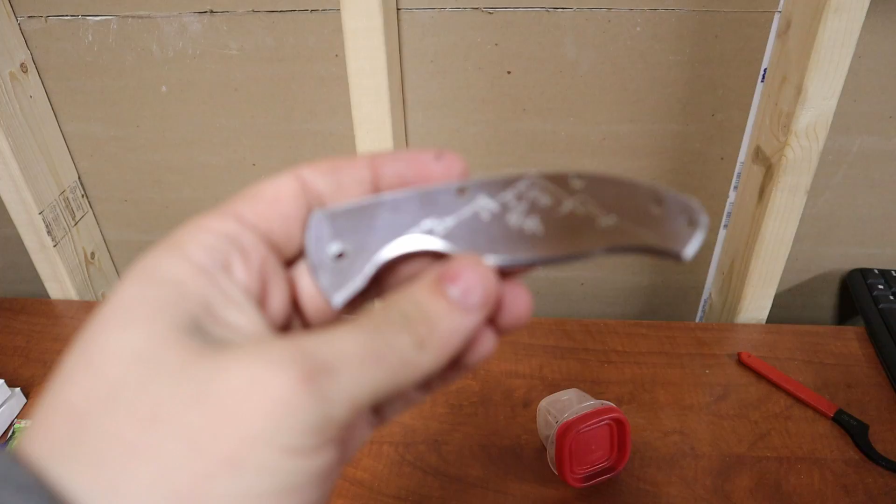Alright, today we're going to work on some handles for this guy. It's a Spyderco Tenacious. Hold on. I have a prototype. Focus. Yeah. So there's a mountain engraved into it, and that's pretty cute, but so that fits like that.

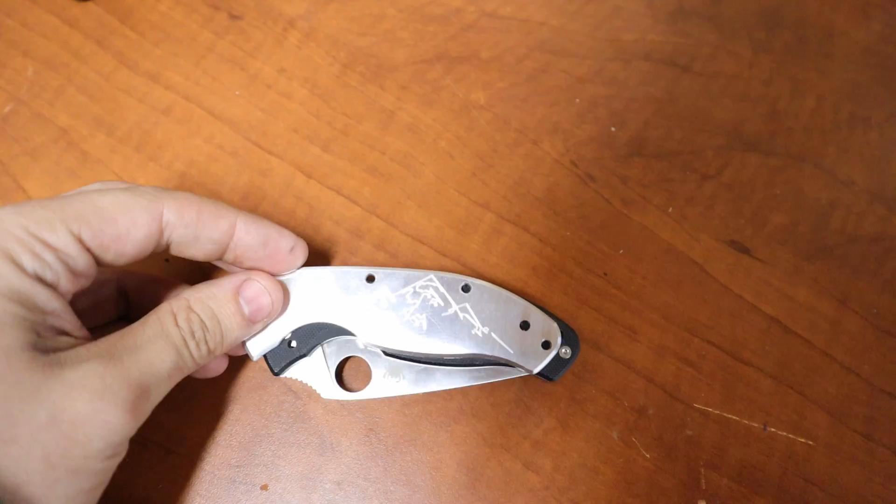There's a couple things we got to work on. One, the thumb release here is not deep enough compared to the one on the actual blade. So you can compare the two. Personal preference, but I'd like to have one that's closer replicated to that. And then I didn't have the right drill size for these holes, so I couldn't actually mount it yesterday, so that makes it a terrible prototype.

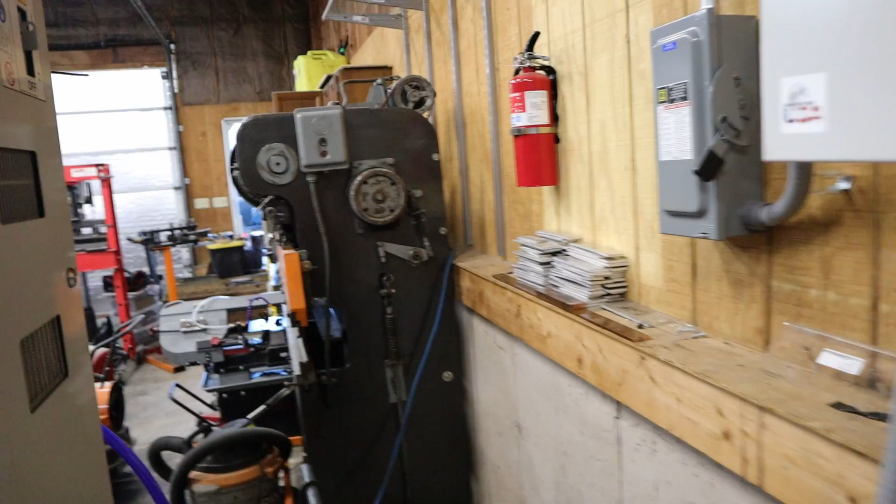And some of the engraving is not as good as I wanted it, but I think it has to do with the fact that the engraver's a 20 thou ball, and this pattern must have been narrower than 20 thou. So actually, we're going to do the start sequence for the machine, and then we're going to fly into Fusion and fix the toolpath. Bam.

Sweet. So here's what she looks like. So this is actually a model representation of... Actually, now I'm going to go find a knife so you guys can compare.

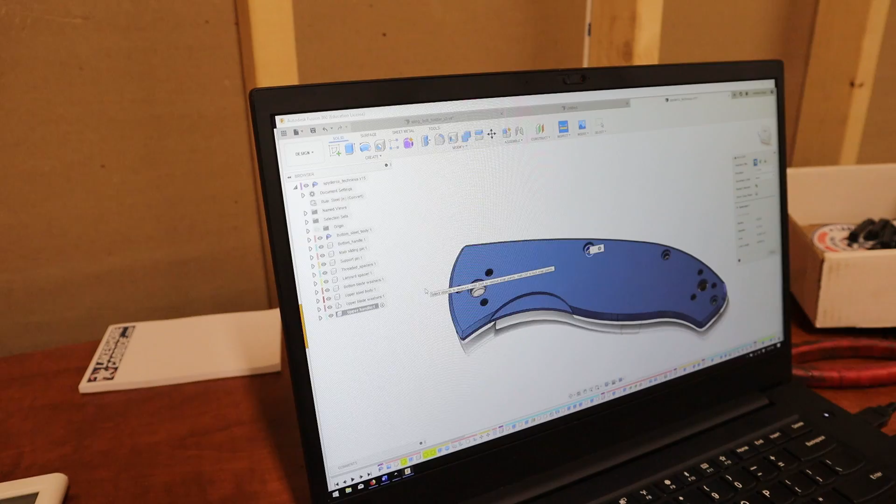Oh, God. Good news, I found it. I went into the house looking for it, and turns out I have fetal alcohol syndrome. It was here the whole time.

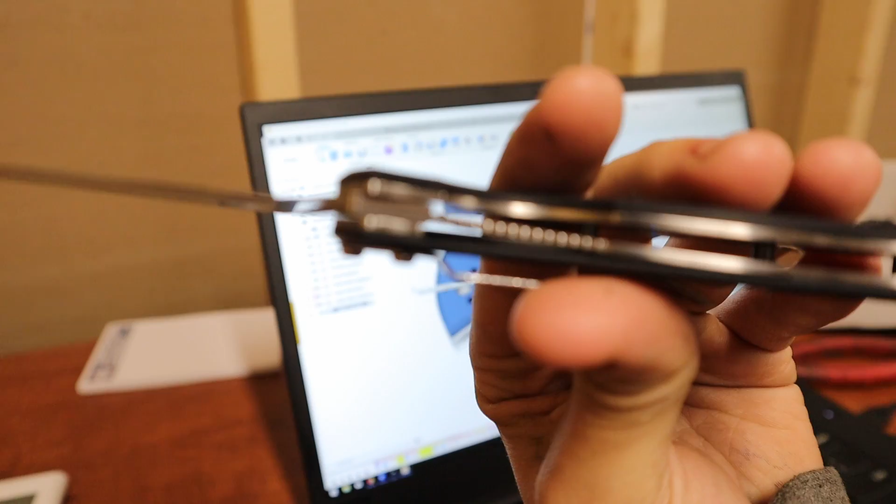What is this? Oh, the other thing I need to look at. This is the real model. And hold on. So what I have modeled in here is if you had handles that were anodized blue aluminum. But the rest of it is pretty much as accurate as I could get it. So you even have the bottom piece of spring metal and then the top piece of spring metal.

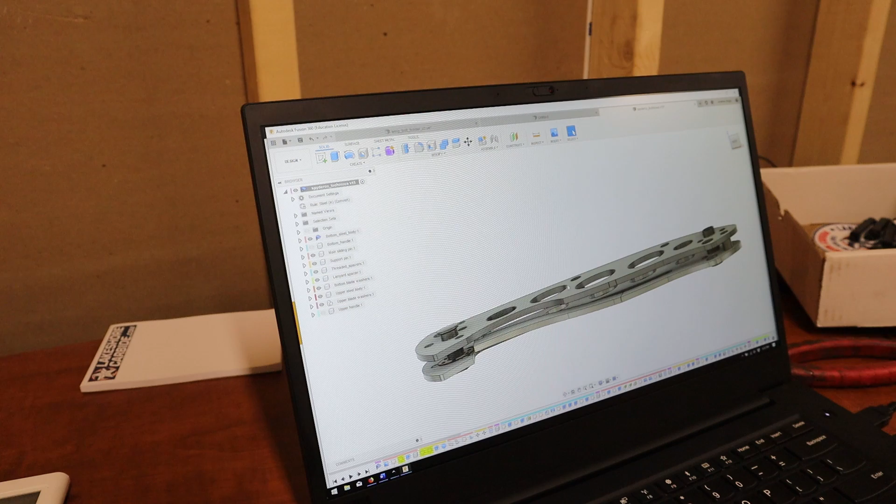And I found out when I was taking this guy apart that both the pieces of metal are pre-stressed, but the top piece has like a bow in it. And I don't know if that's manufactured on purpose, but it adds a little bit of rigidity to the center section of the knife where there's no pins, because obviously the blade sits right in this section and you can't have pins there. So I thought that was kind of interesting, even on this $40-odd knife you can pick up at Walmart or whatever.

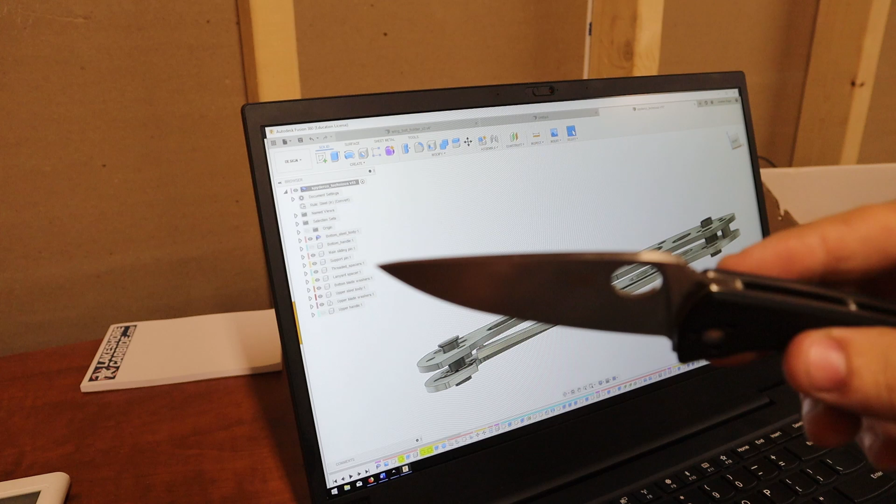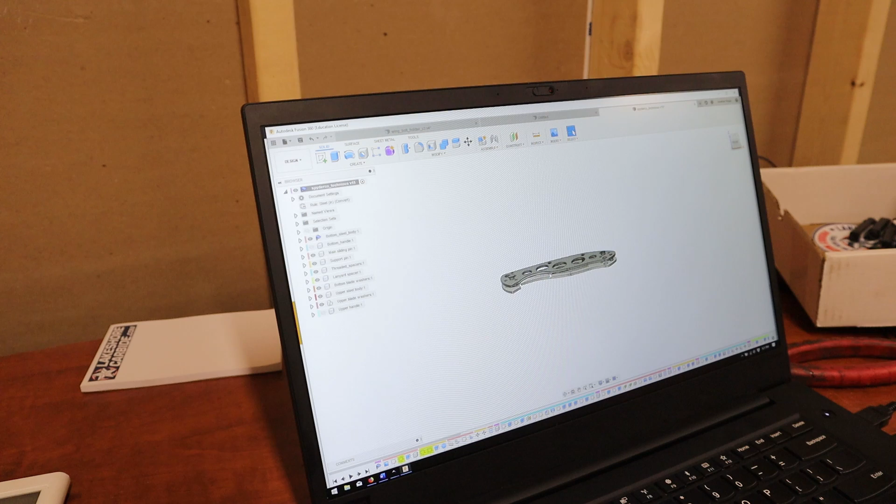And then basically I got as accurate as I could with the slider pin. I'm not actually sure what it's called, but that's what I'm going to call it. And then the lanyard pin over here. And then the actual threaded pins, which are threaded on both ends. The speed holes aren't very accurate, no reason to have them accurate. And then the actual handles themselves are what I care about for doing the profiling. Basically, I took the model and I cammed up the model, and that's how I got this.

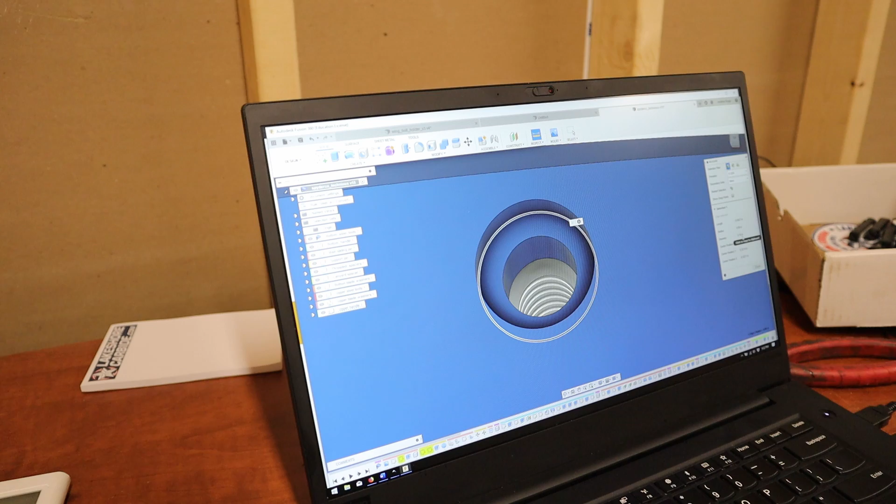So the couple things that I don't like about the handle, which is the reason we're doing another prototype, is first of all, most important, the bolts don't go in. I'll actually just show you on the model, there's a relief here, or a counterbore basically, really tiny, and for some reason I couldn't machine the counterbore with a 1/16 end mill. So if you inspect it, the diameter is 160. So actually that should be machinable. I'm not entirely too sure why it wouldn't let me, but that's something we're going to look at together.

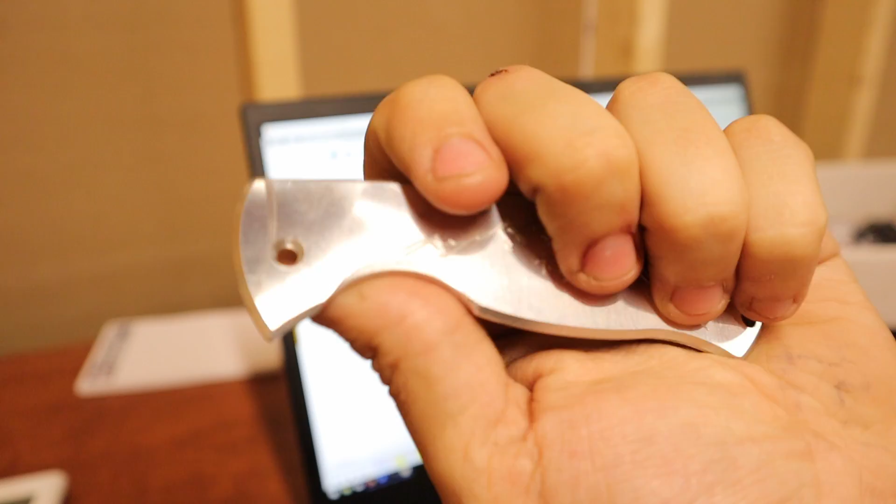And then besides that glaring issue, there's this on the chamfer. I wonder if it'll focus for us. Rippling along here, and that was because the toolpath was doing this kind of thing on the edge, and obviously a not smooth toolpath is going to do that.

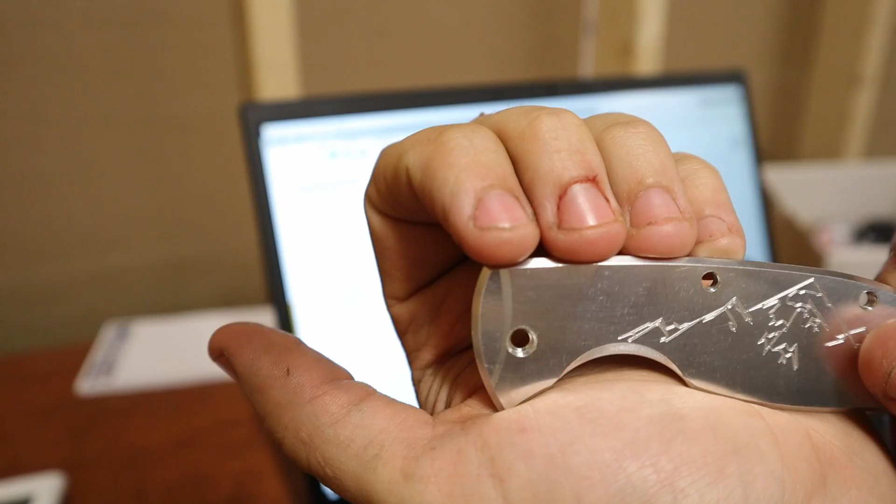And then we have some shell mill marks. You don't feel them, but they're there from the shell mill leaving. I left the bottom just untouched because no one's going to see it, and it's just easier not to have to face the bottom of the actual stock.

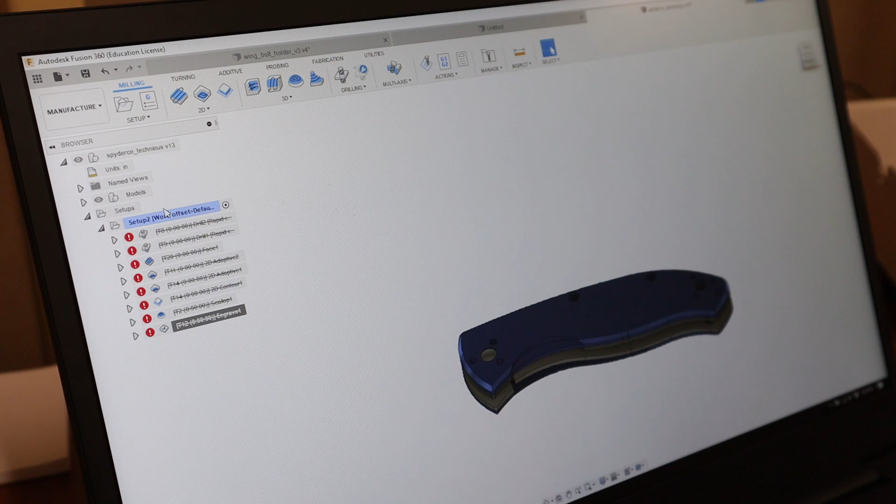So let's see. What I did first was drilled the holes, and originally what I had done was I drilled the holes, but that's because the stock was actually up on top. So basically the model was center the stock, but what ended up happening was I just started gluing the stock down on another piece of aluminum, so I could just profile the whole thing without having to use soft jaws or anything, because I'm lazy like that, and it's prototyping, so I didn't want to have to waste some aluminum making soft jaws.

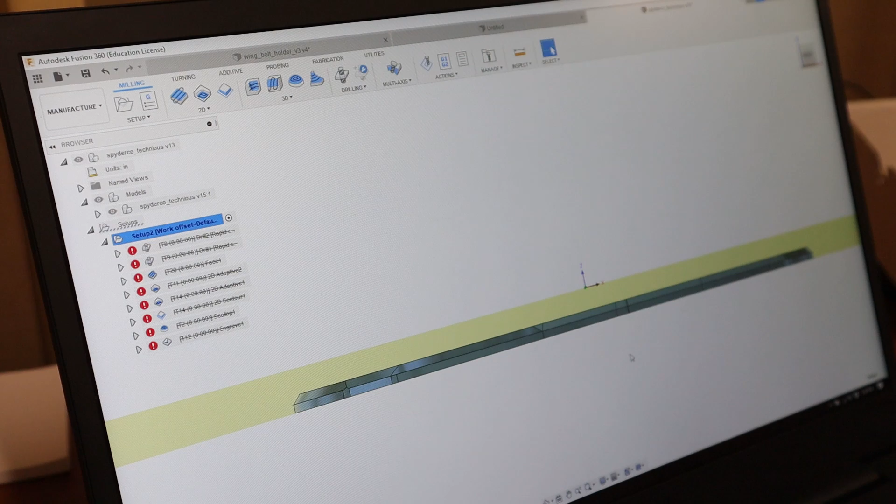Not saying I don't know how to make soft jaws, but what I ended up doing was I changed the model to be at the bottom of the stock for that full profiling. Pilot drill, the regular drill, which we're going to change to whatever size I said they were. Then we did a facing operation, and then we did a 2D adaptive to clean out the section. Yeah, so did the adaptive to do that one.

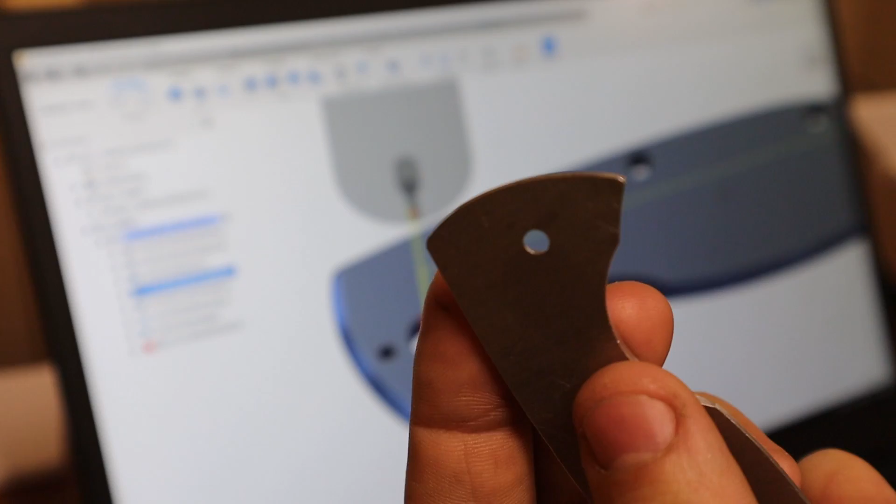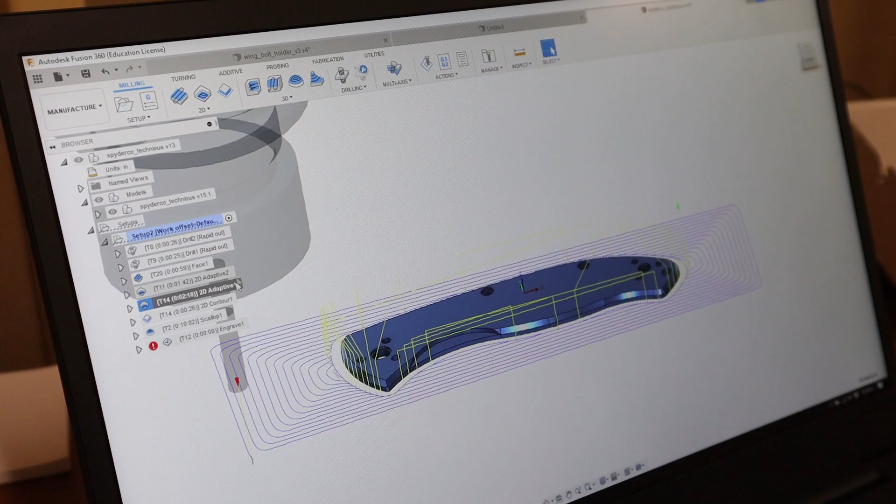Then we went with the 2D adaptive on the outside. Relatively conservative feeds and speeds, I think. 9,000 RPM, 72 inches a minute, so that's a 2 thou per tooth, 440 feet per minute. Yeah, and then full depth, but it's really nothing for a 3/16 tool. And then obviously the scallop to do the outside.

It's chamfer on here, but I don't have the right size chamfer tool. And then obviously the engrave for the mountain that was there. So I just did this as a test for an engraver. I'm using a Lakeshore carbide engraver. Actually, I have it right here, amazingly.

I'm going to fix this thing I was talking about, and then we'll redo the toolpath, and then we'll send it in there and see if that fixes our problems. I got this pretty much squared away, fixed a couple things, and then we'll go run this. But basically, we're gonna pilot drill every single hole. They're not actually holes that do anything necessarily on the actual factory handles, except maybe just for looks.

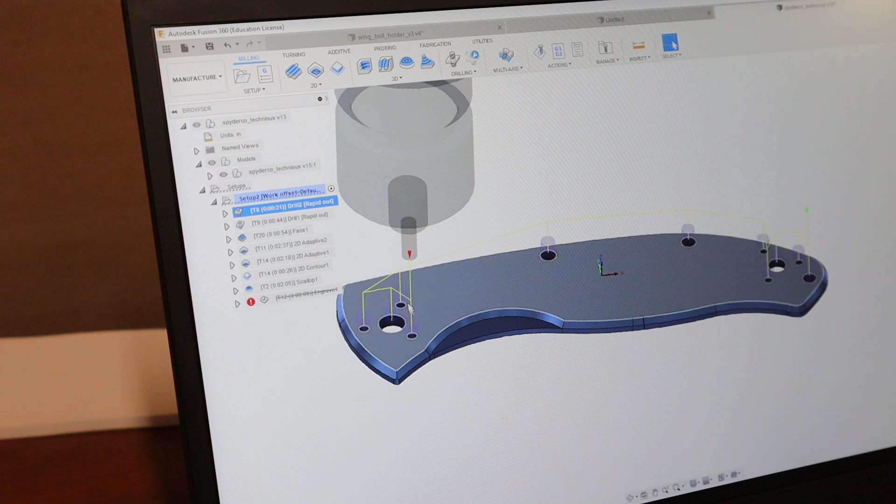I mean, you can see the copper washer down the slider. Well, I don't know if you guys will be able to see, but you can kind of see it. Yeah, that top one, the copper looking thing. Those are the sliders for the action. But what we're gonna do is I'm actually gonna drill those, because those holes are actually the diameter of this drill bit I'm using. So I'm wondering if that's what Spyderco used at the factory.

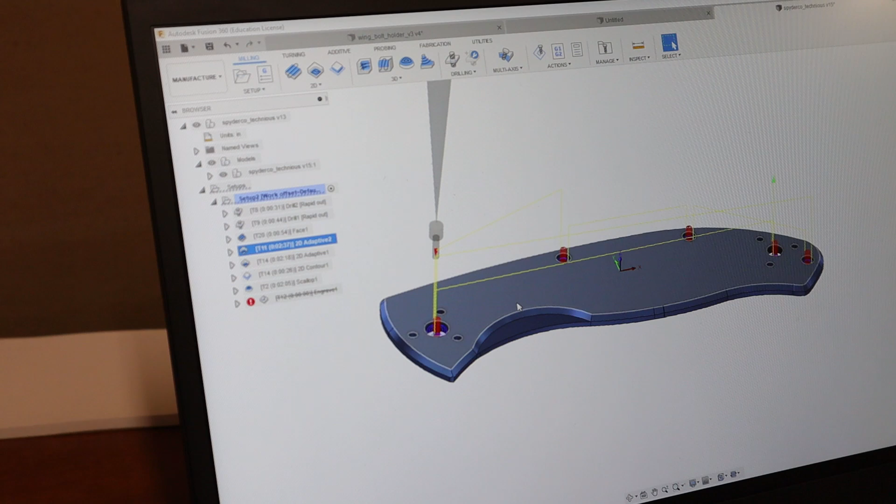So then we're gonna obviously come in here, fly through all these holes. Then we're gonna do a face, 8,000 RPM, just to try to get the finish a little bit better, with a pass extension of 1/2 inch, and chip thinning, but just for giggles, because it's really not that big of a cut. My tool holder went wacky on me. I'm not entirely sure why, but that will now actually bore out properly, it seems, even that counter bore with that small end mill. So we'll see how that does.

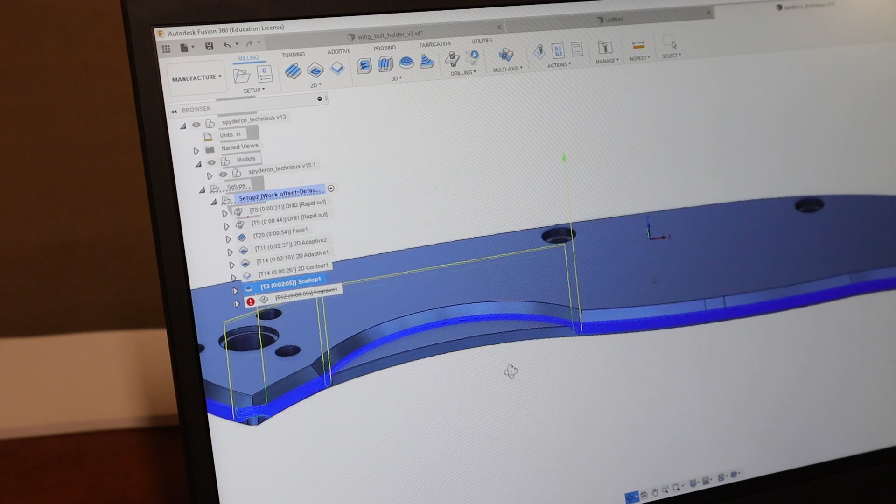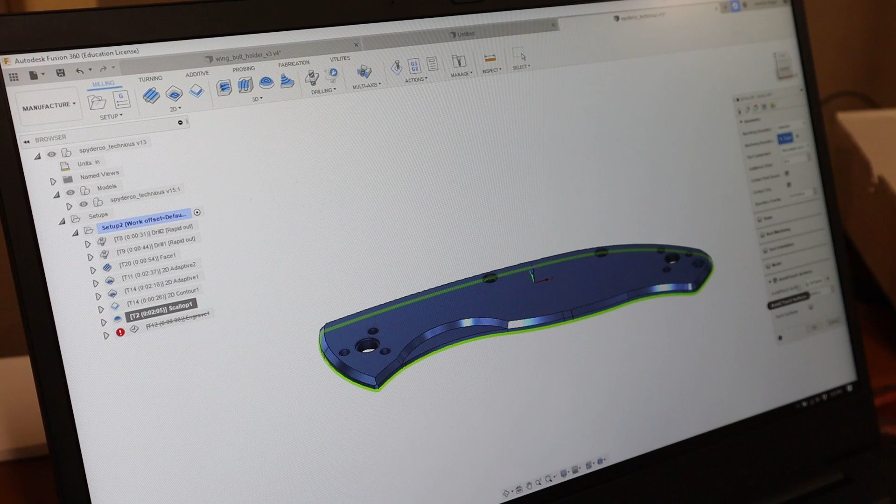Regular adaptive, contour to clean up the edge, then scallop, which, you can see it's a lot more cleaned up, and now it's only going to scallop that chamfered edge with the ball end mill. And so what I ended up doing was using, probably more than I'm supposed to, the avoid touch face, which you guys can see right there. 34 faces. So probably would have been easier just to use the touch mode as opposed to doing this, but you can see I selected pretty much everything except that outside profile.

I even selected the holes, because last time I tried to go in there and rebore those holes, but obviously there's no material left. I also turned smoothing on, because I didn't have the smoothing turned on. That's pretty important for any type of surfacing, which is exactly what we're trying to do here.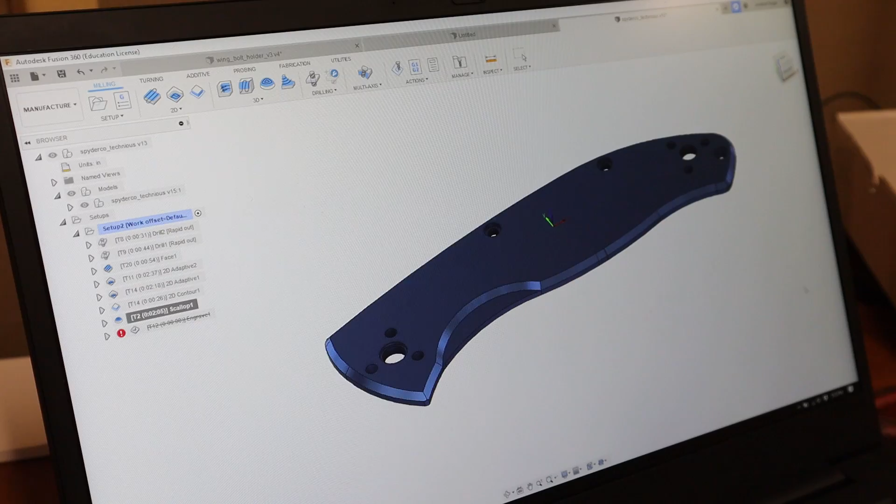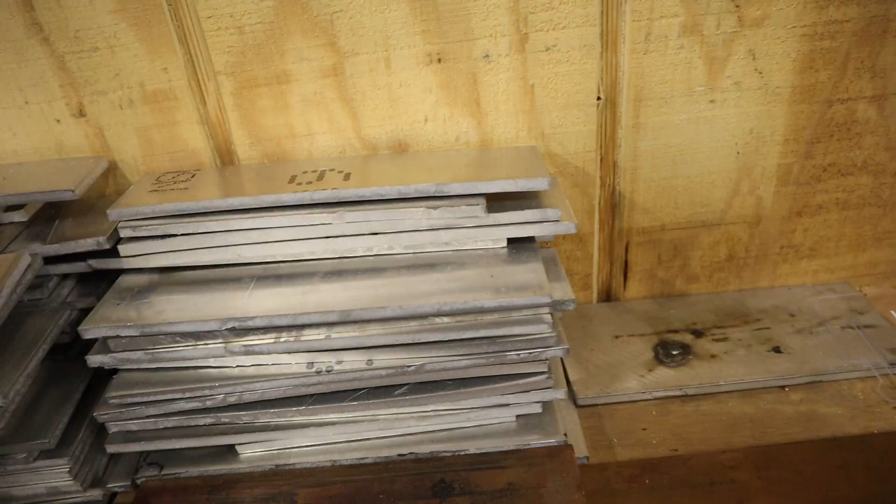Let's go. What we're gonna go do, the machine's warmed up. We're gonna go get some stock, which in this case is just pieces of 1/4-inch aluminum sheared up, hanging out over here on the sheared aluminum wall. So any of these pieces will do that are kind of the correct size. So we'll maybe do this one. Ooh, this one's pretty tiny. I'm also looking to see how flat it is.

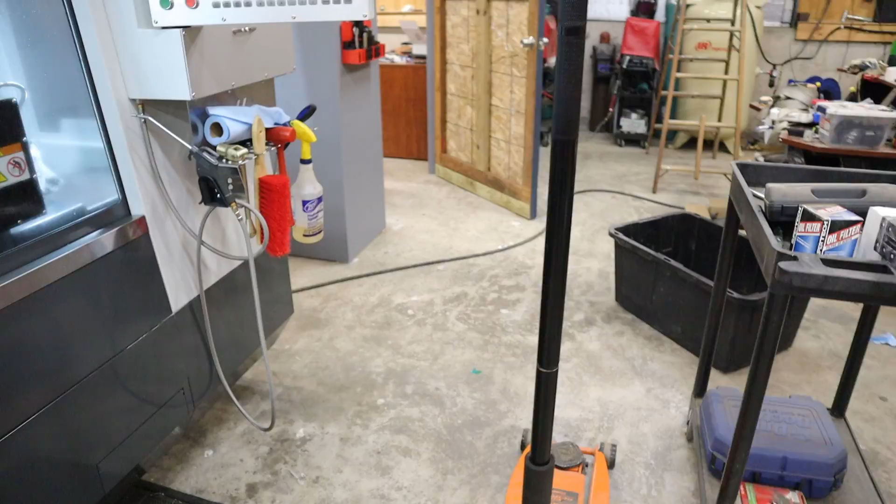I need a table for you guys. We'll put you on this cart. This is perfect. This is the camera cart now.

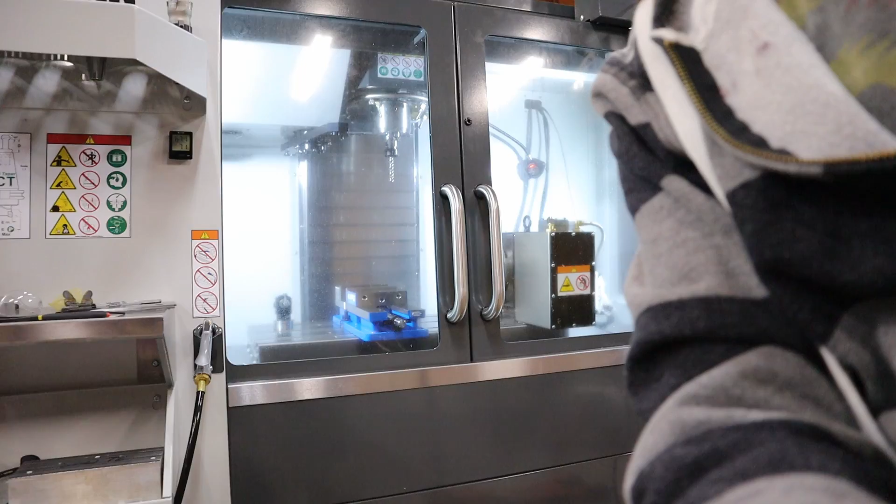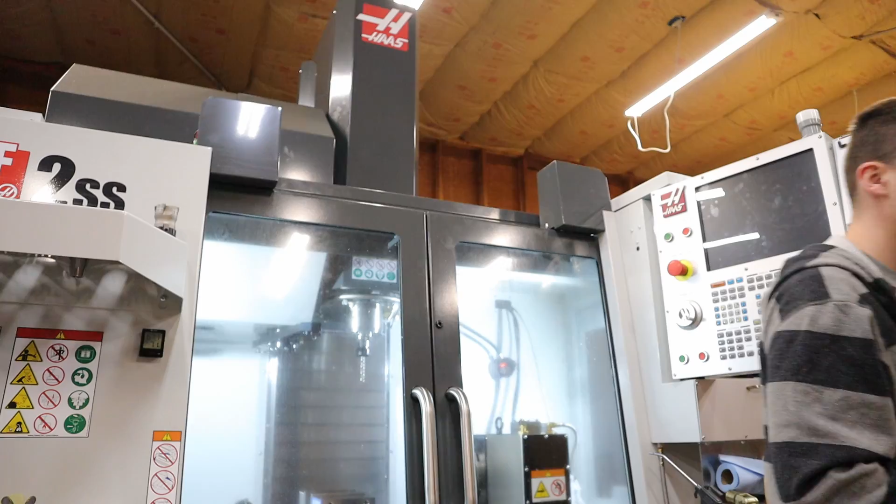I'm gonna go get the deburring tool and we'll deburr the edge, and then we'll set up like a, what do you call it? A glued thing with the tape and the thing, and I'll be back. I actually don't know where my tool is. I was using it yesterday.

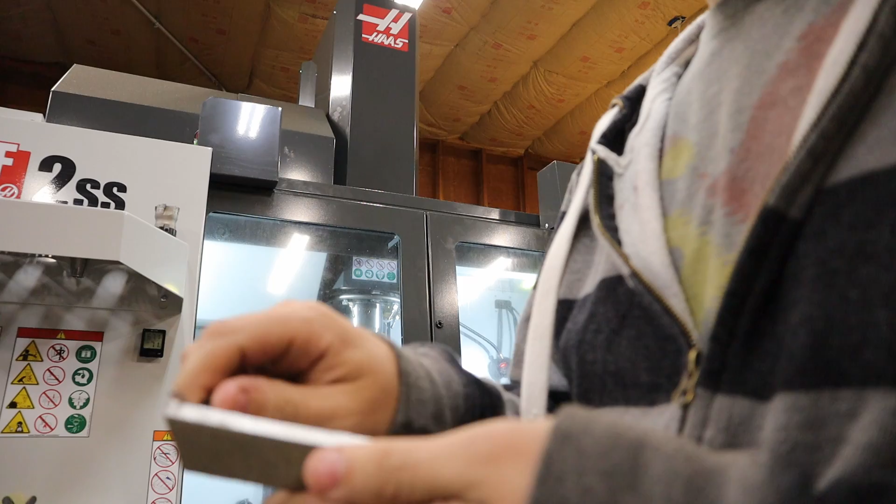Yeah, I got one of these little deburring tools off Amazon. Like, I know you've all seen them, but it works so good for these sheared edges, because you know what happens is this shear, well, my demonstration's not going very good. Against the edge.

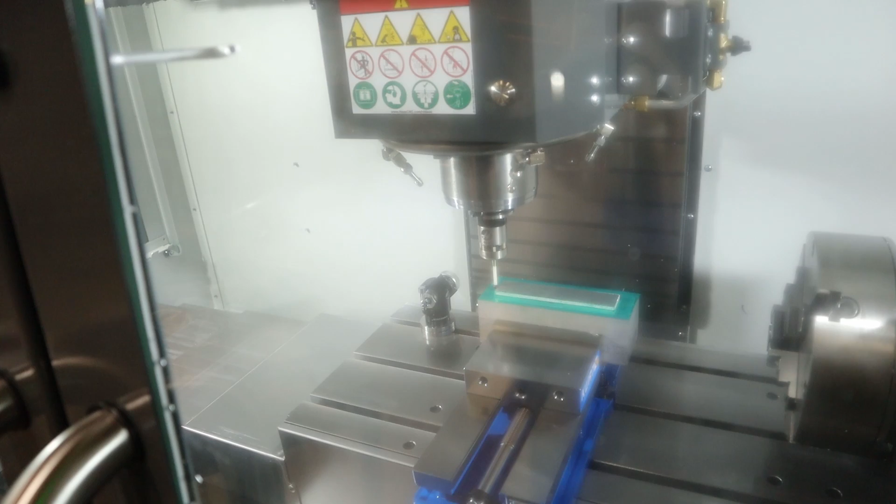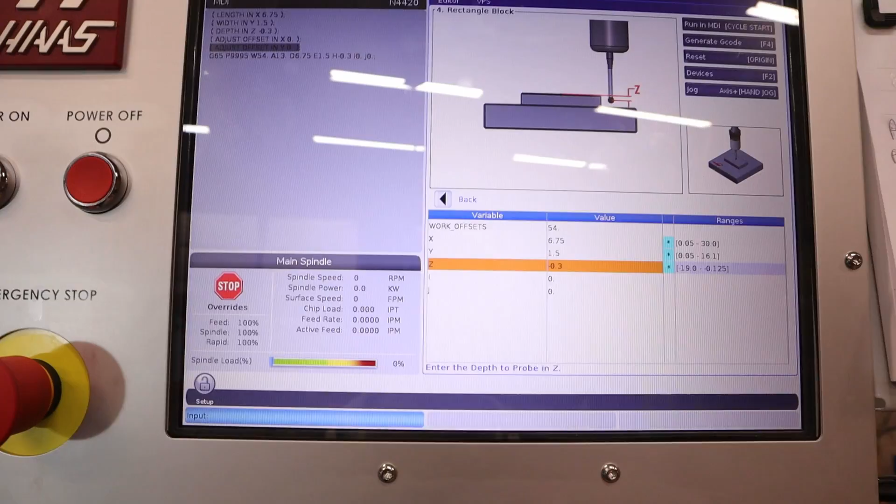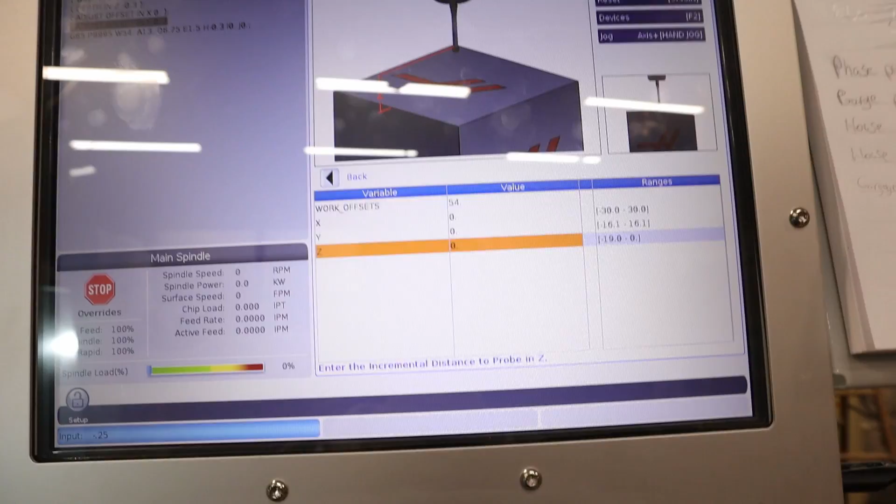Cool, so what that actually did was it set X and Y to the center of our part. But Z is still not set, and to do Z, the only way I know to do it is go down here to single surface and do like a minus point, and then you look again, you can say 25. And then you hit cycle start, and it'll actually probe in Z. Cool.

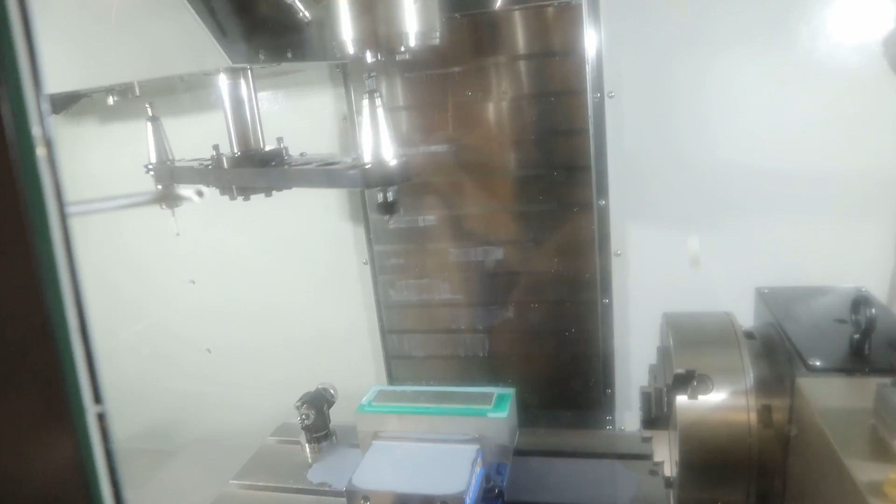And then what I'm going to do is I'm actually going to feed hold right above the part. And we have 0.63 in Z to go. And if you turn the coolant off and check it, you can kind of tell where it should be good. So yeah. And bam, right through the table.

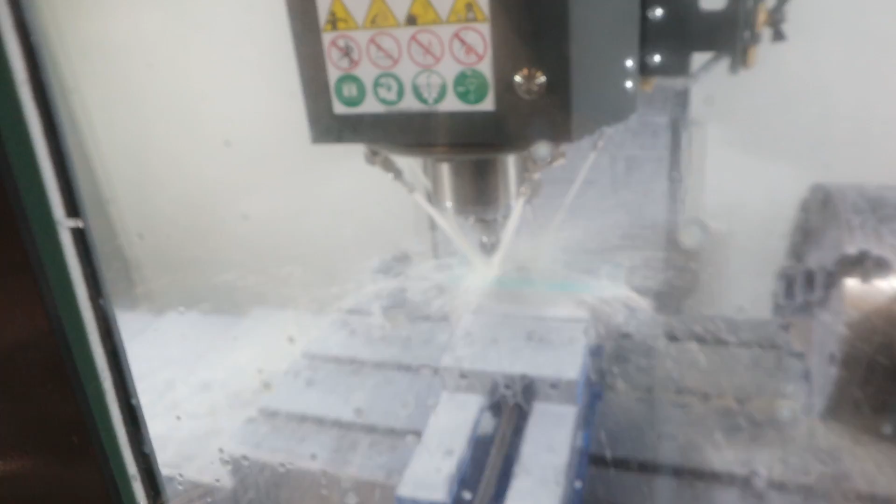Oh yeah, I did forget something. I forgot to put the new drill in the drill chuck. Yes. The mind of a 3-year-old. Alright, so for the actual drill feed, I completely winged it, so we put 50% feed. That didn't seem too bad. Alright, 100% feed rate. Big boy face mill.

Misty! Hopefully it won't blow up. Very cool. Very sweet, very cool. That sounded healthy.

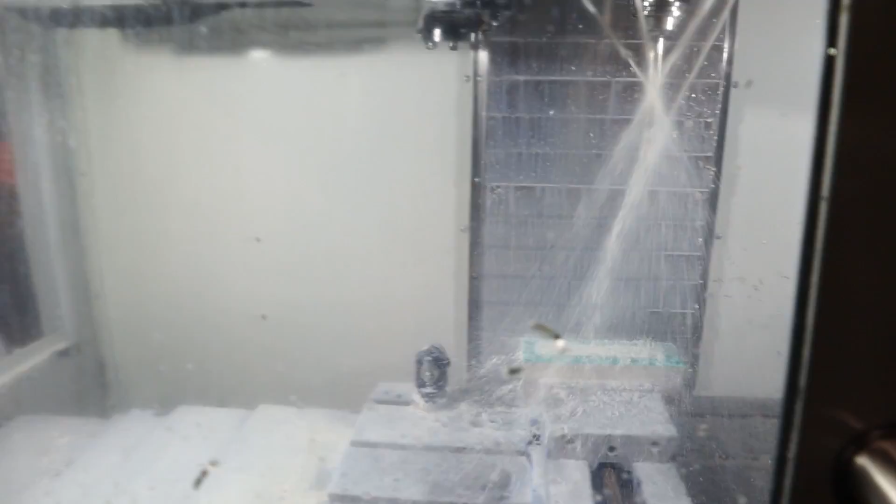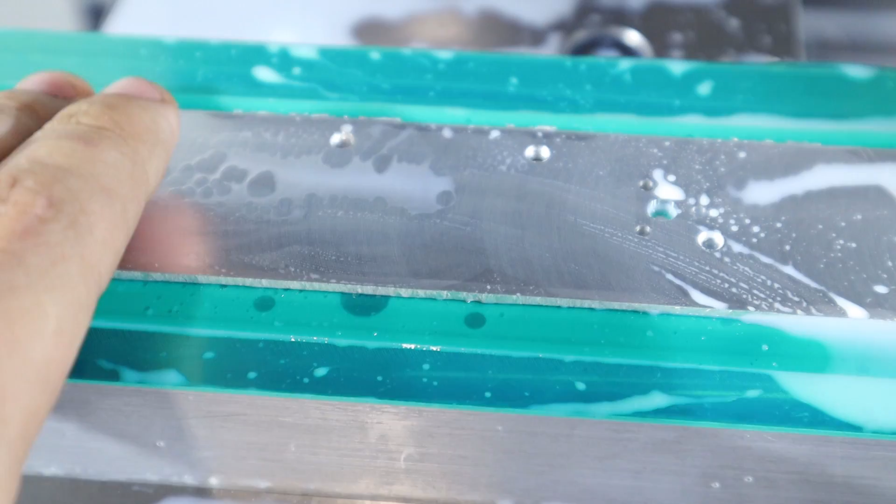Okay, here's what we got so far. I had to stop it because I had to turn on high-speed machining, and of course I forgot. So, surface finish, not too bad. I don't have those weird wisp cuts like I did with the other one, but I do have this weird discoloration at the top. Ow, that hurts my cuts. But the holes look a lot better than yesterday's, as far as getting that counter bore or whatever. So that's a good sign.

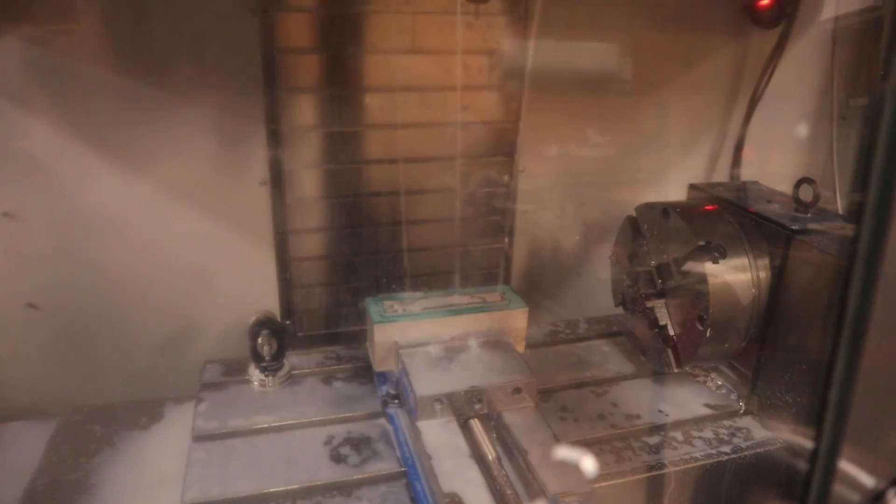Right, this one should be pretty exciting, and by pretty exciting I mean not really, but still. Oh, the timing! Yeah. So that's what I was talking about. All right, boys. Let's try this again.

Cool. So yeah, that's what it's supposed to do, and actually it's only at 9K, which is 3K away from max. So yeah, with the compressor starting up and this thing starting up, this thing always loses, because of that low voltage warning. But just the things you got to deal with. Like I said, I still have a transformer I got to install, a buck boost, and I've been not doing that because I've been busy doing this.

I love how quiet this spindle is compared to the TM we got at work. The spindle on this thing is crazy. Like, I can't hear it outside the garage doors, which is absolutely insane to me. Obviously, hogging out aluminum, you can hear that kind of stuff, but...

Oh, buddy. So this is now a full 12,000 RPM, and you can see all the voltage, the lights dimming and everything. And this is doing that surfacing on the side. Oh yeah, she's a fast one at 100% rapid. All right, let's breathe in that smoke.

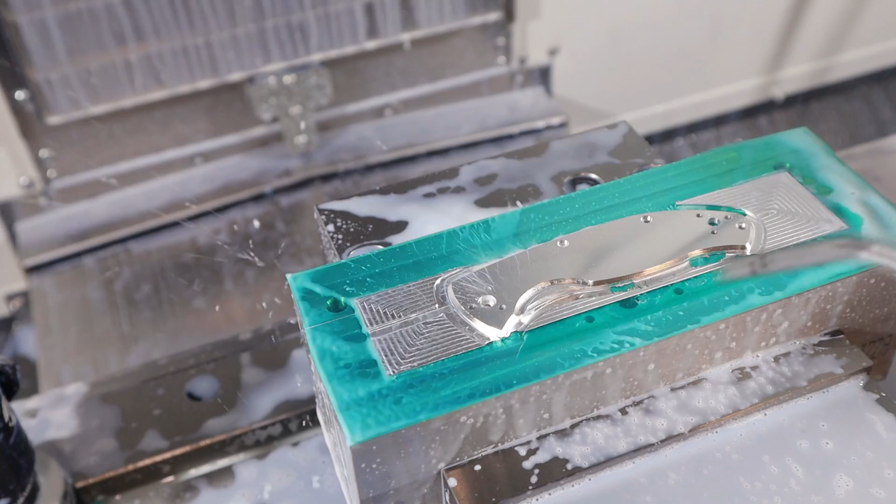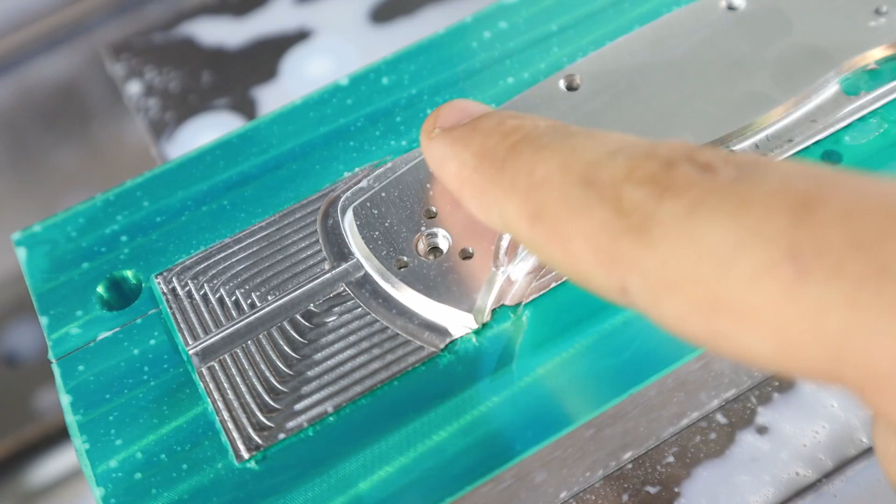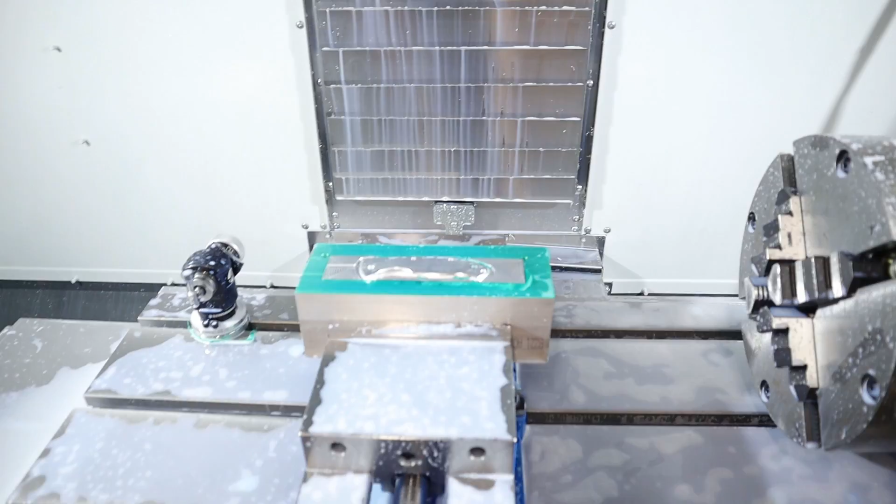Oh, I forgot to machine this part out. See this? There's a thing. So, hold on. Let's go into Fusion. And what I'll do is I'll make sure that adaptive actually comes, or that we'll do a contour and just clean that up really quick. So let's go change that real fast.

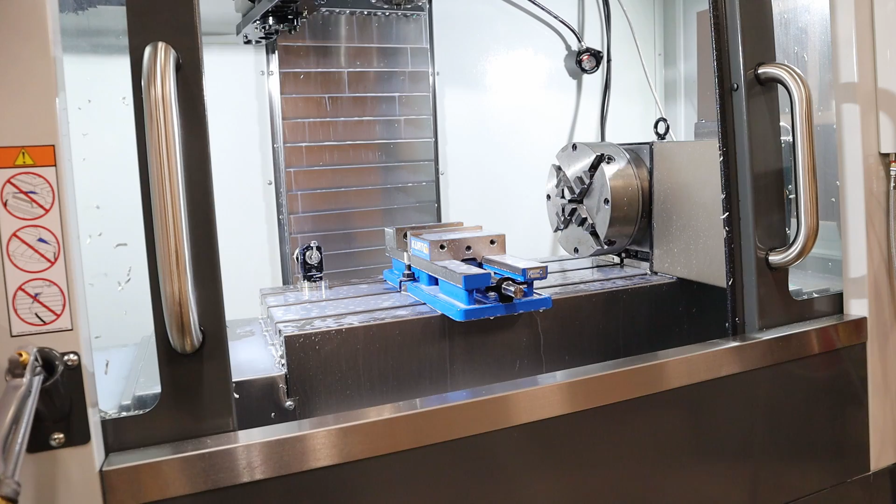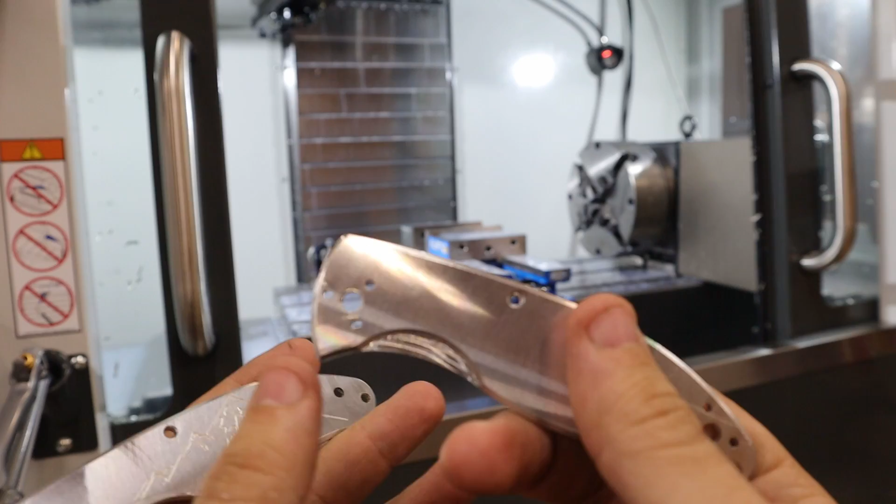Let's do a comparison of the two. So here was the one you guys saw that I did yesterday and then filmed because I'm a terrible person. It's with the etching in it. This one doesn't have etching, but here's the newish one. I also put a fat scratch in it from deburring it. Put a fat scratch there too.

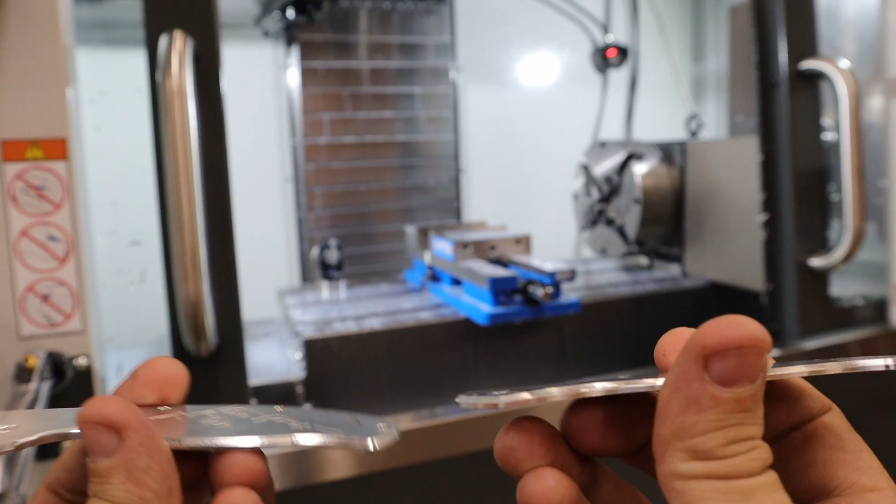But yeah, as far as handles go, this one's definitely a superior handle, if you will. We obviously fixed the issue along here with the ball end mill, but then I gained some issues along here and here with the ball end mill, but nothing that cannot be fixed in CAM. So the third one is definitely going to be sick. The holes are much better on this one. It's actually cleaned all the way out as opposed to this first one.

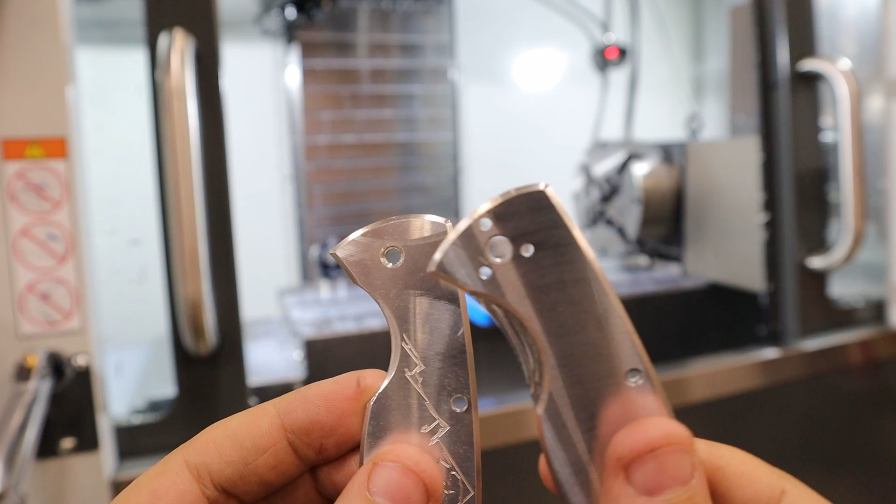If you could focus, that'd be fantastic. So yeah, you can see the difference in the actual hole size. So the slider pin might actually fit, and also the thumb area is much bigger on this one. A little more comparable to the final handle. So I'm gonna go grab the knife. We'll compare this current prototype version 2 to the handle on the knife.

And here's what we got. Of course it doesn't want to focus. Stop focusing on the blade. The camera's like, I like shiny things.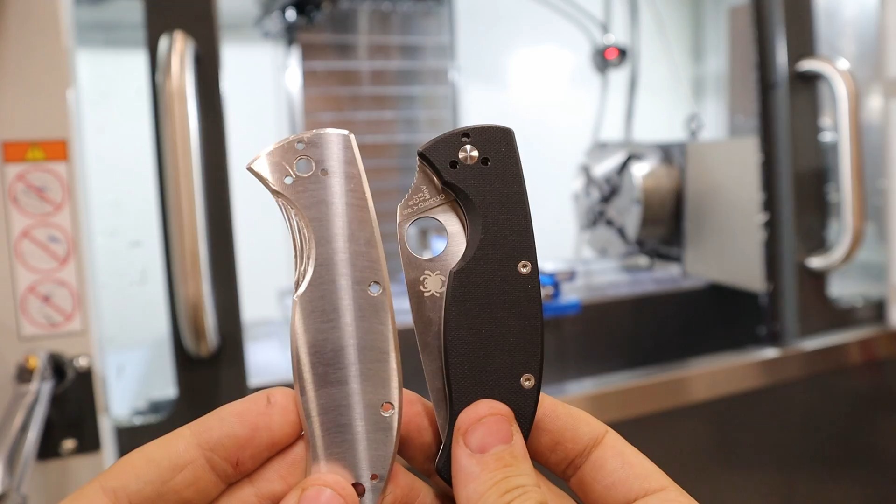Alright. So there's what we got. So it's a little more accurate of what's on the actual blade. Oh, also the face mill was a lot better on this one. And that'll actually polish to close to mirror, I bet. If you guys can see yourselves. Kind of. But yeah. So I'm gonna go and we'll get this guy installed on here. Hopefully it installs. And that should be it for now.

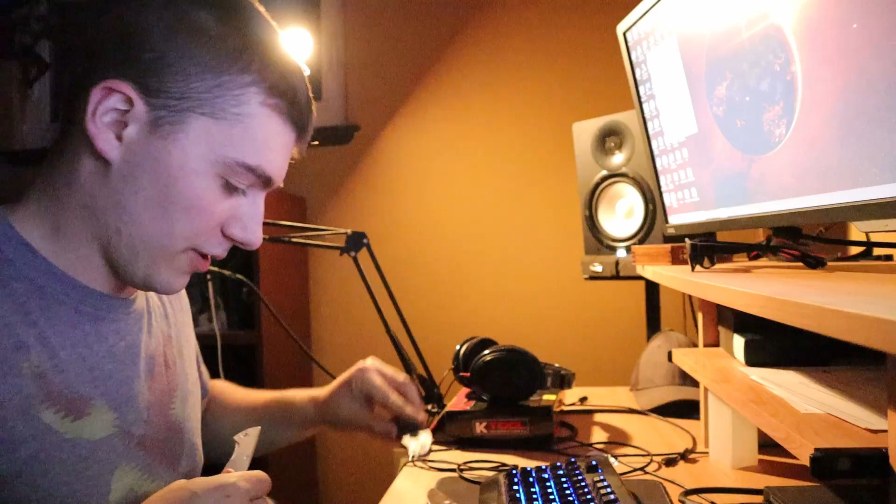Alright, what's up guys? So I'm over here trying to put the new handle on the body of the thing. And basically what I found, which is why we're prototyping, is these holes for the slider pin, which is this guy, where the actual knife rides on, actually swivels on, it doesn't fit. When I modeled it to exact size, that's probably why. Just add a couple thou, and then the same thing with the lanyard pin on the back.

So tomorrow what I'm going to do is widen those holes just slightly. We're going to fix this thing I was talking about. I don't know if you can see it in the light. That guy. And then I'll try a full body engrave too. So we'll take the whole thing and maybe do engraving on the entire thing, even surrounding the holes and stuff. But I don't know if I'll have time tomorrow, but we're going to at least try to fix the mounting stuff. So that's pretty much it for this video.